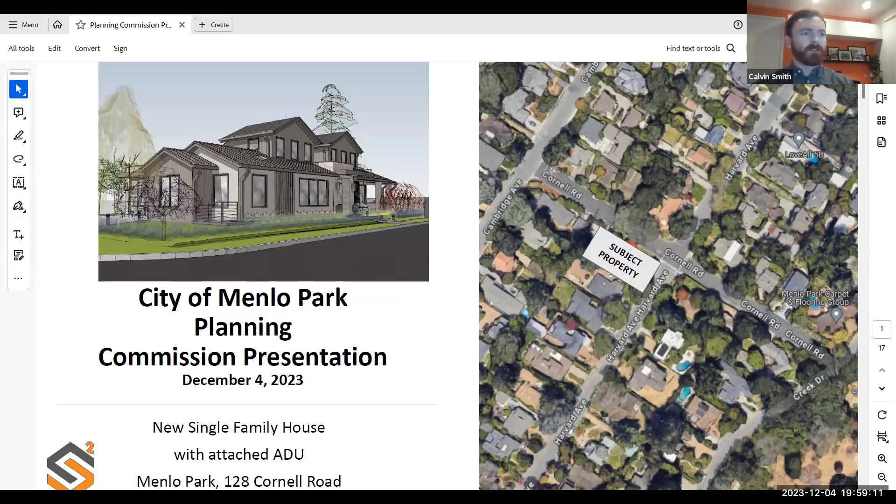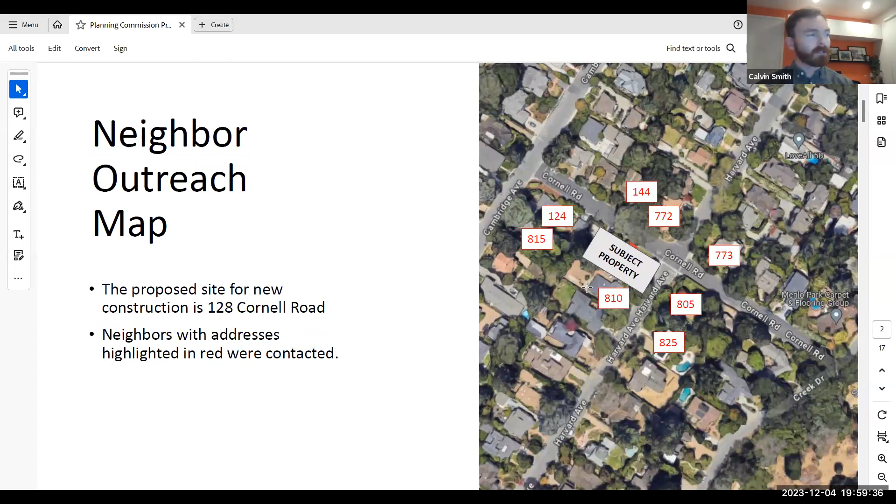We had conducted a neighborhood outreach back in December 2022 and reached out to all of the immediate adjacent neighbors, showing them the plans and offering meetings. If you could go to the next slide, please. Only one neighbor had responded, and that is the neighbor immediately behind the property at 810 Harvard Avenue. If you could go to the next slide, please.

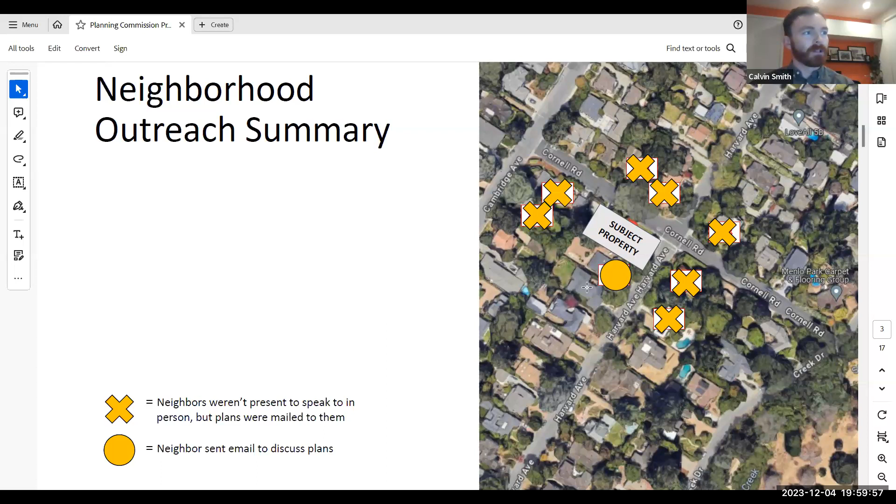We had corresponded for about a month or so. He had some privacy concerns in relation to the first story and second story windows we were proposing. We worked with him to address those concerns, showing him that all views from the first floor windows were blocked via the adjacent neighboring fence and also privacy screening via landscaping.

At the second floor, there were a few windows he took particular note of. We relocated one of the windows located in the primary bathroom's water closet to face the rear yard rather than the side yard overlooking his backyard. At the large window at the tub in the primary bath, we changed the window glazing from clear to frosted glazing in order to obscure any view, but also allow light into the primary bath for the residents. That satisfied all of his concerns.

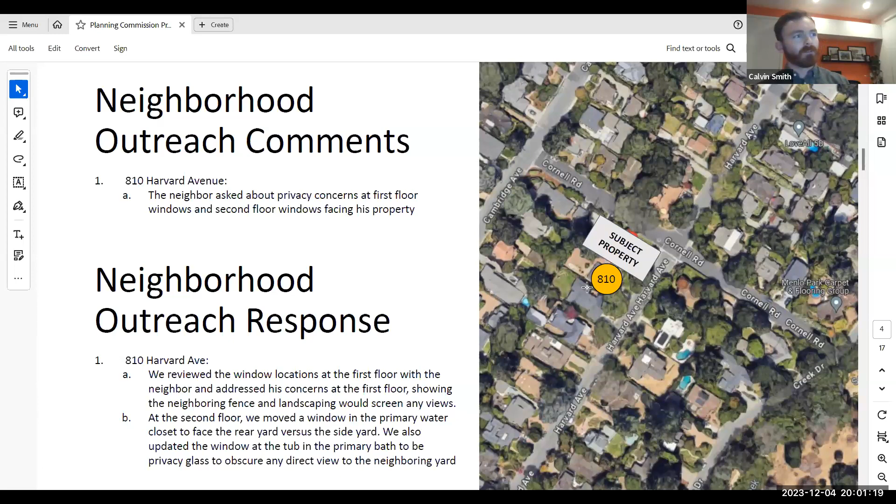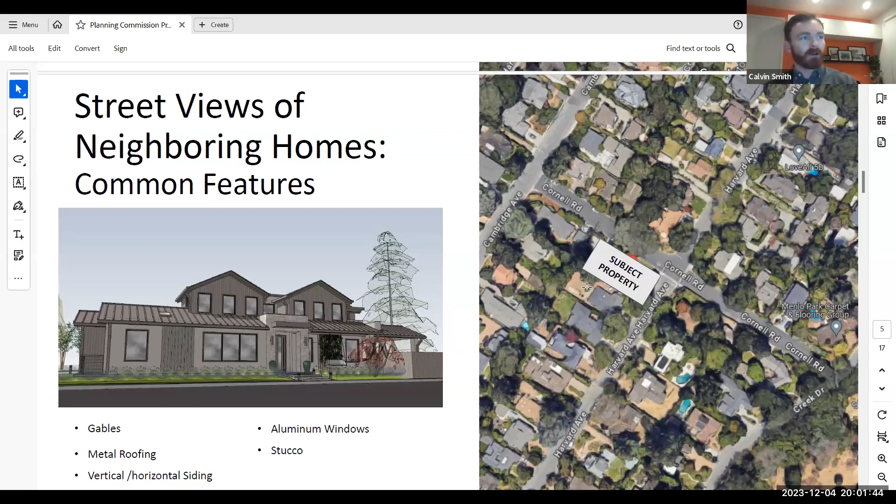In considering the design of the home, we took in a lot of the neighborhood's prominent elements, including gables, metal roofing, vertical or horizontal siding, aluminum windows, and stucco, in developing the design for the home at 128 Cornell.

These are street view images of a lot of the neighboring homes to the property. 1, 2, and 3 are all new developments. They are all 2-story developments, with the majority having gable elements along with metal roofing. The adjacent 4, 5, 6 neighboring residences all show typical elements that are very prominent throughout the neighborhood, which we have incorporated into our design, including stucco siding and vertical siding, which you can see at number 5, and gables throughout the roof in 4.

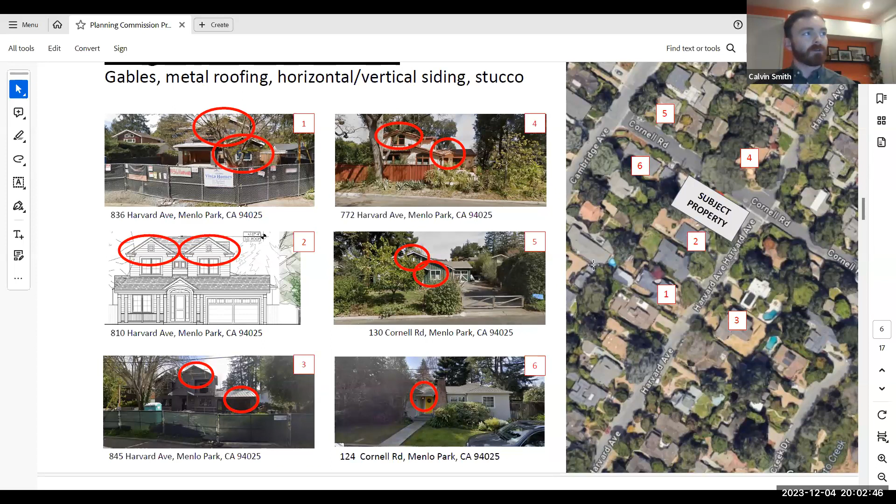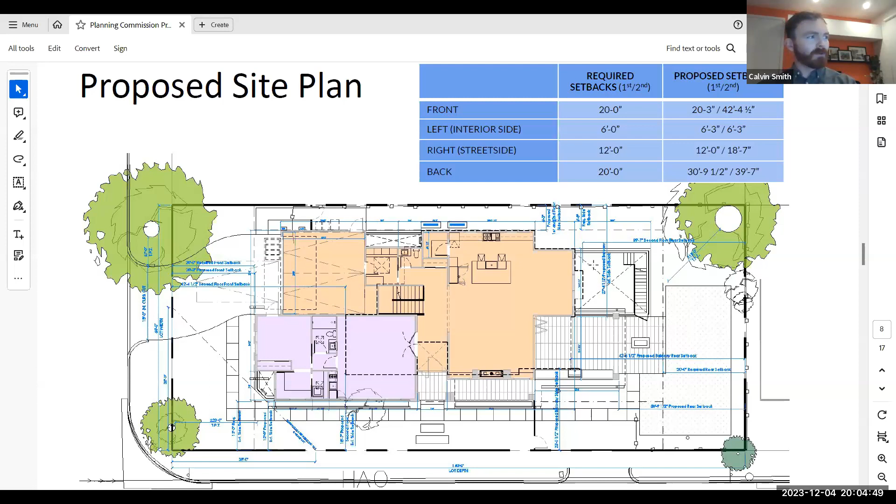In the proposed site plan, we're not requesting any additional conditions for the lot. We are meeting all required setbacks and then some. The second floor is noted through the dashed dark line, and you can see that the majority of our second floor required setbacks are met and exceeded. Our rear setback, with a 20-foot requirement, is actually at 39 feet 7 inches. At the front yard, with a 20-foot requirement, we're at 42 feet 4 inches. The second floor footprint is quite stepped back from the street side setback here at the bottom of the page. While required to have a 12-foot side setback, we're proposing an 18-foot 7-inch setback in order to reduce the appearance of the second floor and have the first floor read more clearly at the street side view.

As a requirement of the jurisdiction, second floor balconies require a 30-foot rear setback and a 20-foot side setback. Here you can see we're proposing a 30-foot 3-inch rear setback and a 20-foot street side setback, so we're adhering to the required setbacks for the balcony.

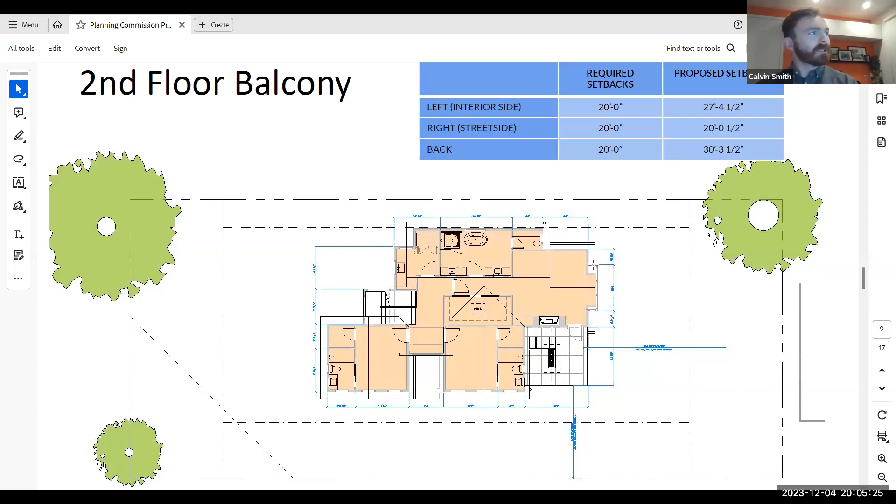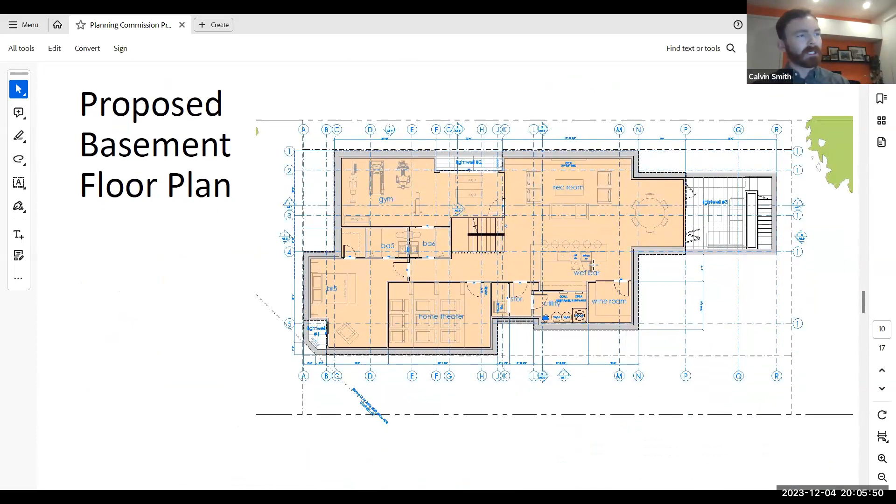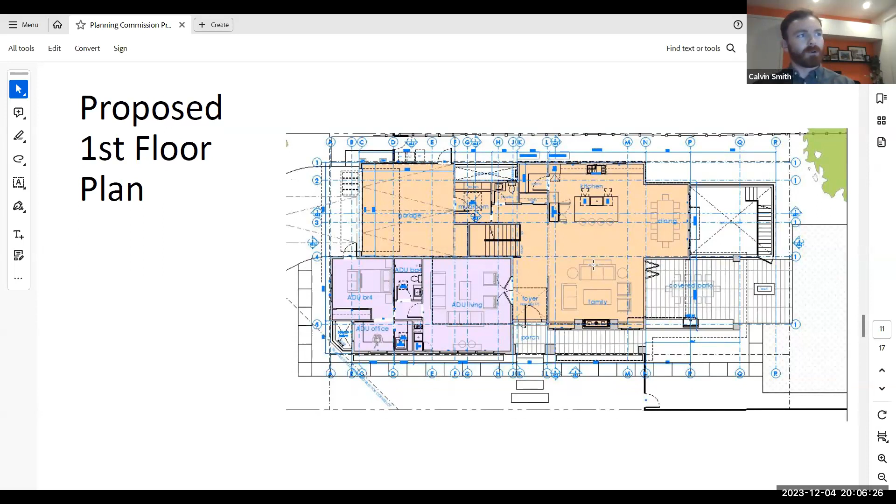On the first floor is where the majority of the shared spaces are located. We've placed the 2-car garage at the front setback, at the top left corner of the plan, with the entire ADU reading on the first floor, which is street side. Then you have your typical kitchen, family, and dining open floor plan on the first floor.

Moving to the second floor, it's quite modest in size, actually at 41% of the total allowable floor area when the maximum allowed is 50%. We've located two bedroom en-suites on the second floor, along with the primary suite and a modest sized laundry room. This, as I mentioned, is quite stepped back from not only the street side setback but also the front and rear setbacks in order to reduce the visual impact of the second floor.

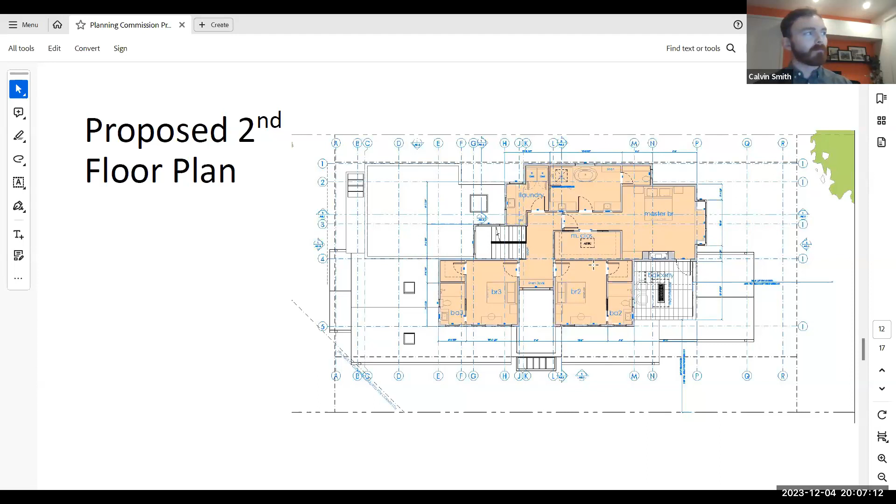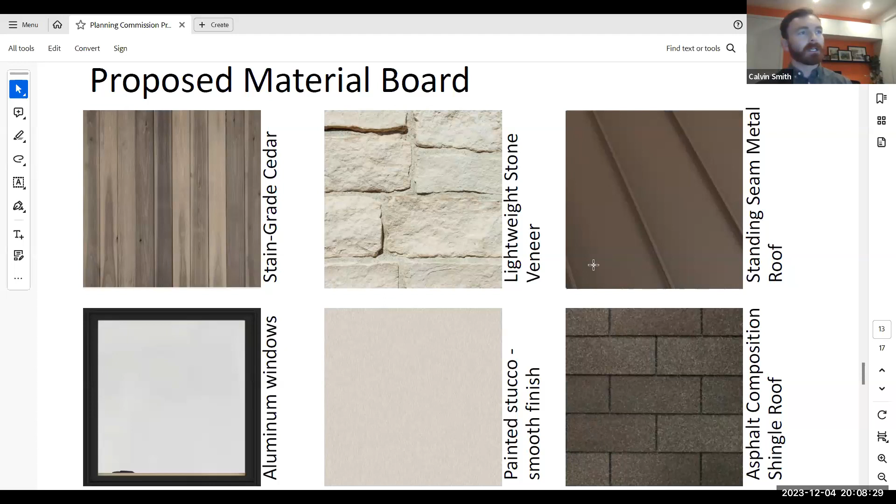If you can move to the next slide please. So here is the street side setback, which is our primary facade when viewing it. We've incorporated a gable at the front yard, on your left-hand side, and continued that throughout along the street side setback, in order to reduce the overall prominence of the second floor and have this read as almost a one-story element with a very reduced second story behind. It's also very typical of ranch homes throughout the neighborhood, both in existing homes and the new two-story developments going in.

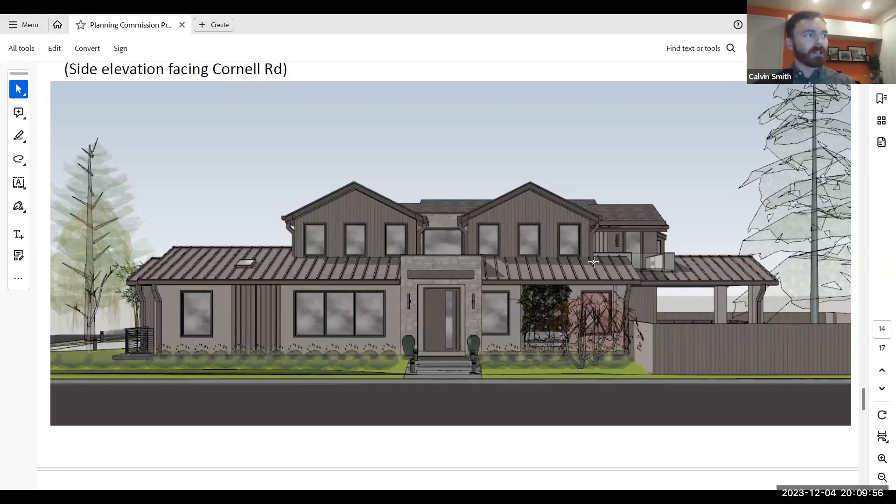The double gables on the second floor are calling attention to the entryway, but also providing a complementary central access point at the entryway, with a very balanced facade on the right-hand side and also the left-hand side. If you could move to the next slide please.

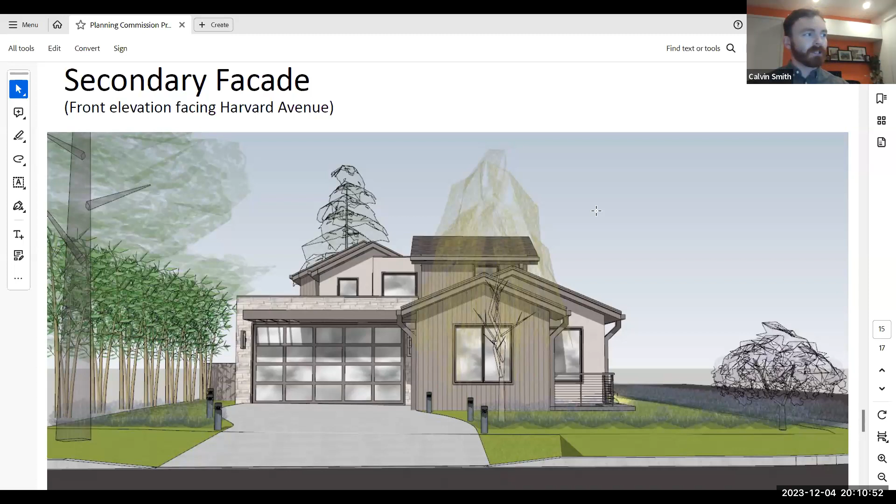This is actually the front elevation, which we're considering the secondary facade, not along the prominent Cornell Road. Here you can see that the second floor footprint reads drawn back from the first floor, so the first floor reads very prominently. We've also incorporated a flat roof over the garage and over the stairwell at the second floor, in order to reduce the prominence of it from the street side, but also the neighbor at 810 Harvard Avenue to the left-hand side. If you could move to the next slide.

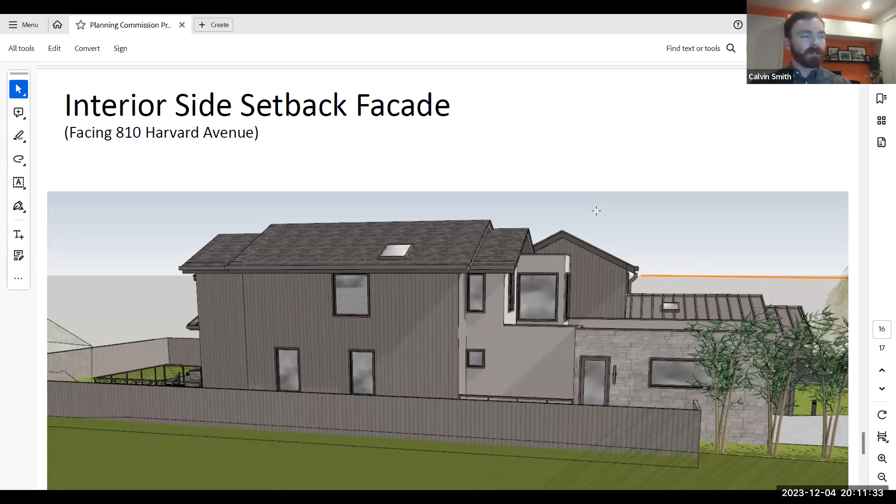Here is the interior side setback facade, which is the view from the neighbor at 810 Harvard. You can see that we've incorporated a lot of his requests by switching out the window at the second floor with frosted glass. You can also see that we've stepped back the two-story element on the left-hand side, in order to reduce the visual of the two-story element when viewed from his backyard. If you could go to the next slide please.

That concludes my presentation. Again, I just wanted to express my appreciation for taking the time to consider our application.

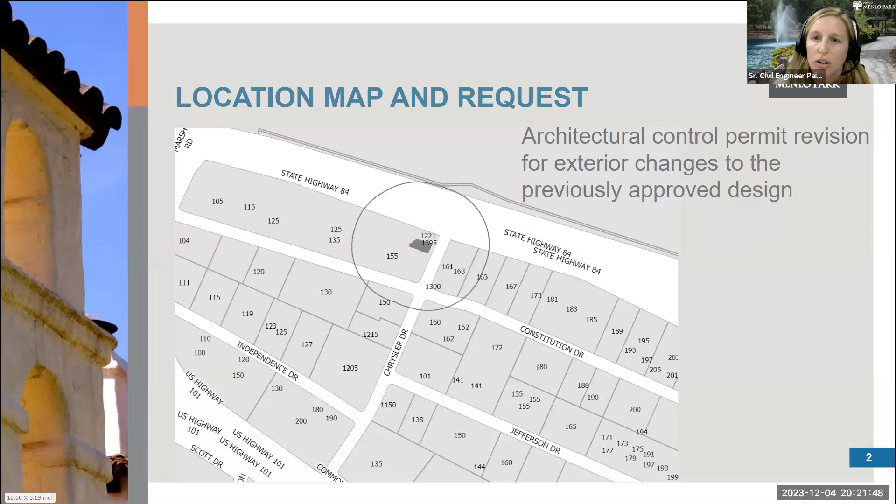So this is the location map and our request. This pump station is currently located at the intersection of Bayfront Expressway and Chrysler Drive, a small little parcel right there. The request is for an architectural control permit revision for exterior changes to the previously approved design.

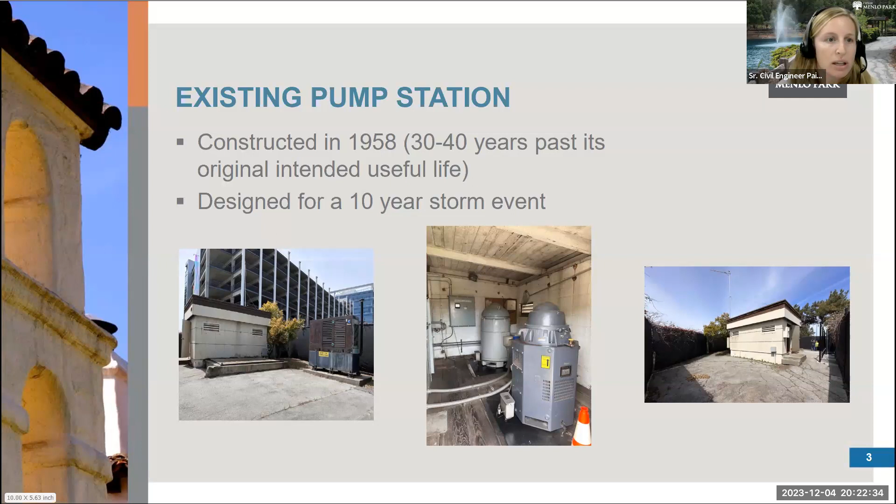Next slide, please. A little bit of project history: this was last presented to Planning Commission in 2021. At that time, the Bohannon Development Group had elected to both pay for and install an exterior ornamental shell around the pump station, and that was what was presented to Planning Commission and was approved. Since that approval, Bohannon has requested and gotten approval to revise their agreement with the city to give them the option to screen with landscaping in lieu of installing this exterior ornamental shell.

I'll touch on what the changes are in the next slide, but first I wanted to emphasize a couple reasons why schedule delays are really impactful to this project. The first is that the existing pump station, only having been designed for a 10-year storm and being so far outdated and out of its useful life, is really critical city infrastructure that needs to be replaced. Every day that the new pump station isn't up and running is another day we don't have higher capacity for these big storm events. So keeping this project on schedule and getting the new station up and running and serving our community is super important.

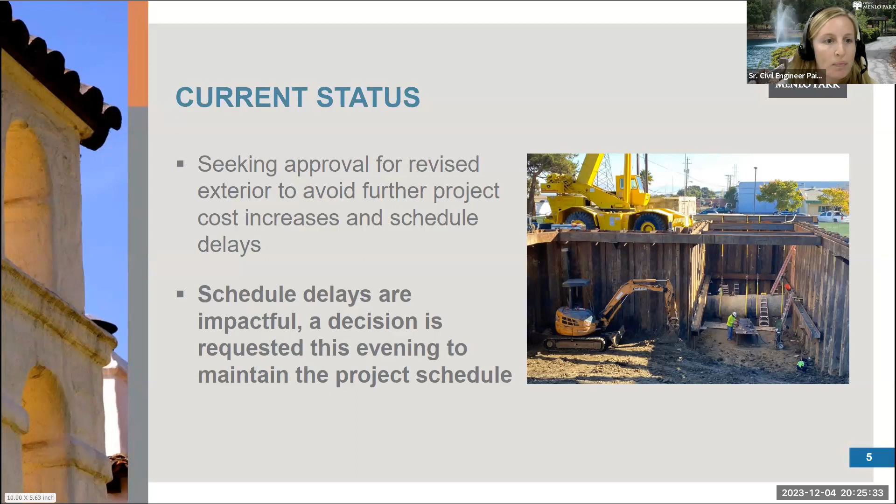So I think in light of all of that, a decision needs to be made tonight, hopefully, to maintain this project schedule. Next slide, please. So that takes me to the requested changes that we're bringing to you tonight.

The second change we're requesting, and this one is hopefully a more exciting one, is that the CMU that was spec'd for this structure was a very basic, cost-effective CMU because no one was going to see it with this exterior shell installed around the building. So in light of the shell being removed, we want to upgrade to an architectural stone colored ground face.

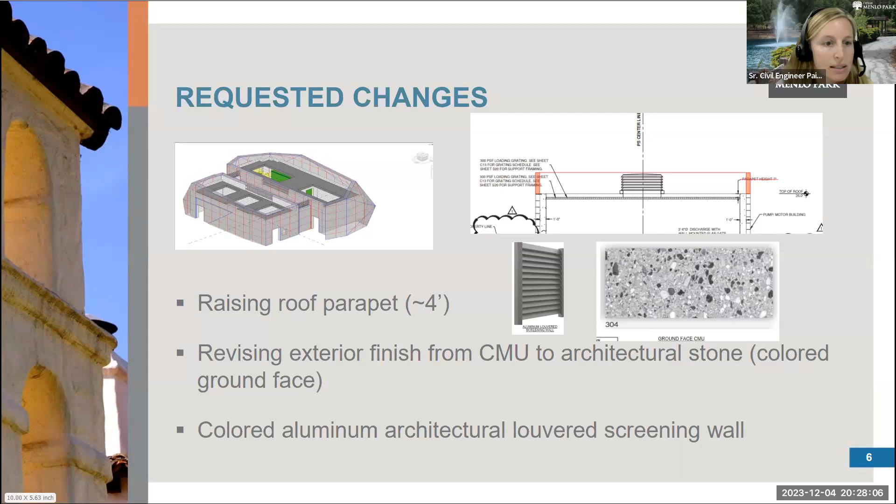Next slide, please. So our staff recommendation is to approve the requested changes, as the design both provides screening for all the equipment as well as visual interest to the extent possible for a structure of this use type. And second, approving these changes avoids any additional construction cost increases and schedule delays or impacts to the grant funding that this project has received.

Next slide. So thank you so much. Let us know if you have any questions, and we really appreciate your time to evaluate this decision and help us move the project forward and get this critical infrastructure installed.

Great. Thank you for that presentation, Ms. Saber. Any clarifying questions? Commissioner Riggs? I do have some questions regarding the design, but perhaps it would be more appropriate after any public input. Thank you, Commissioner Riggs. There's no burning questions now.